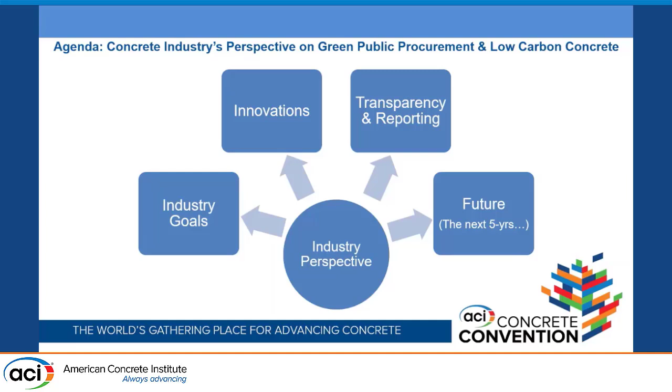So let's talk about industry goals, but before that, the one thing I do want to address is the cement and the concrete industry have been regulated for many, many years. And so when we talk about green public procurement, this is just an addition to what we have been encountering for a number of years, not only just from regulators, but also impetus from, as was alluded to, media, and also just the things that we do as an industry to make sure that we are not polluting, being wasteful, discharging inappropriately, all of those things.

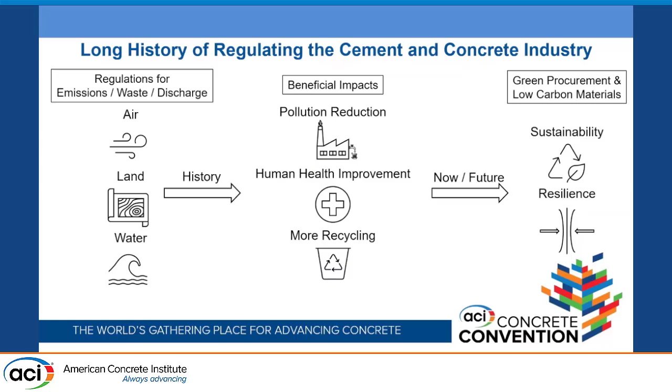So we've been doing this for a long time in terms of regulations on emissions and waste and discharge, and there has been significant benefit. Right? There's significant benefit in terms of pollution reduction, human health improvement, and certainly an increase in recycling. But if we're going to achieve what the Paris Climate Accords have required, what federal actions and policies are requiring, what state legislatures are requiring in terms of low carbon materials, then there are some things that we have to do differently.

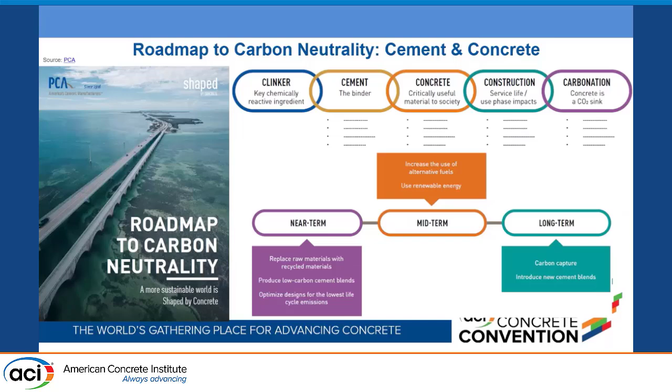Now, the cement and concrete industry has goals. These have been published for the last couple of years, and you can go and read the roadmap to carbon neutrality. But essentially what it says is the cement and concrete industries will be net neutral by 2050, and all along the supply chain there are going to be opportunities to reduce our carbon footprint and get to that net neutrality, and there are going to be near-term, mid-term, and long-term things that we will be doing. All of those things are covered in the roadmap, so I won't get into those, but the information is there, and the perspective from the industry is we will get there.

In terms of the things that we're doing right now, one of the things is just to simply be clear about what those goals are. So we want to communicate carbon reduction goals. We want to do the things that we've been doing in the past and maybe do them just a little bit better in terms of quality assurance, quality control. If we're going to be sustainable, we have to make sure that we are doing things in accordance with those specifications that drive down the carbon footprint and improve performance. Okay, so good quality control plans are a must.

And then we get into the mixtures part of it in terms of optimizing mixtures. Specifications should be allowing the use of innovative cements, SCMs, admixtures. So we get into that performance engineered mixtures type of specifications. We have to set targets, but to set targets, we often also have to know where we are. And I'll talk about that in just a second in terms of our benchmarking and the industry average that we report.

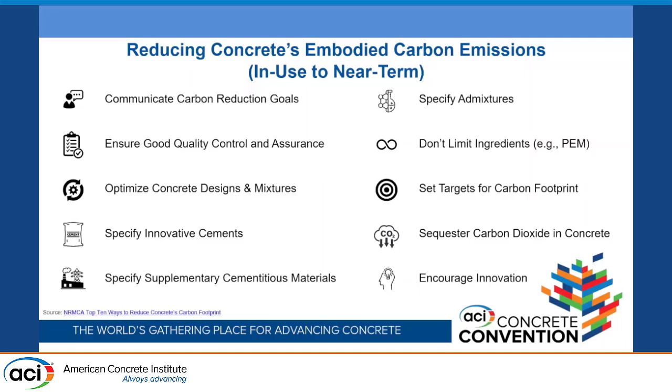And then take advantage of concrete and the sequestering of carbon, the carbonation that occurs with concrete. We should be taking advantage of that. We can use that in terms of material production. We can also use that when we look at the entire life cycle of concrete and the carbonation that occurs just naturally. All of these things should be encouraging innovation, and that should be not only at the producer level, but also at the designer and the specifier level as well. Okay, so innovation should be done by all of those parties.

So let's talk just a little bit about innovations. We could go on in terms of innovations for a long, long time, but I just want to address a couple of things. One, in terms of cement, we can have a significant impact on concrete's carbon footprint, of course. And so we begin to see more and more movement away from our typical ASTM C150 type of cements to the ASTM C595 cements, and in particular, we've already heard mentioned Portland limestone cements, right?

Those have been in the marketplace. If you look at the market right now, probably 50 to 60% of the use of cement across the U.S. right now is Portland limestone cements. There's other cements, slag blends and things like that, but the cement industry will be moving very, very quickly in terms of the cements that are introduced into the marketplace. And that is going to cause change.

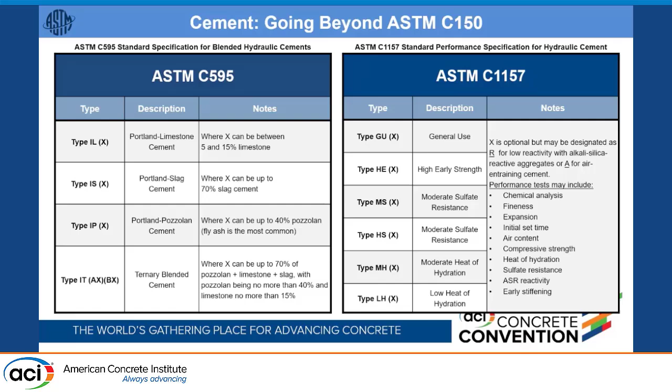I'm an engineer, most of y'all are engineers. We hate change. It is difficult to deal with, but it's life as we know it right now, and it will be life as we go forward, okay? So the complications that come along with changes are things that we are going to have to deal with. We've already had some change in terms of the Portland limestone cement, changes that contractors have to deal with, producers have to deal with, and we will begin to deal with even more. We will get more complex cements into the marketplace.

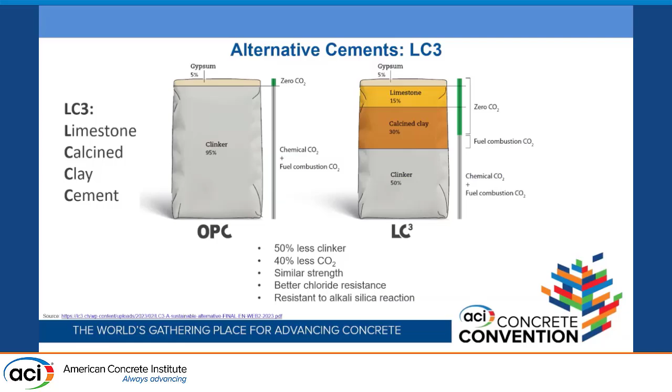What I'm hearing from cement producers is adoption of materials like this one, LC3s, or limestone calcined clay cements. This is, again, substitute materials for the clinker that is the high carbon emitter. This one in particular using calcined clays. Where you get the benefit is you're replacing about half of the clinker with calcined clay, limestone, and of course the gypsum that's already in our ordinary Portland cement.

You get the benefit because you're not having the chemical release of CO2 from the limestone through the kiln, and you have lower kiln temperatures when you're calcining clays. Take all of those things together and you can get reductions of 40% in terms of your global warming potential. So these are the types of things that as an industry we will have to be evolving to and also adapting to as we get to construction.

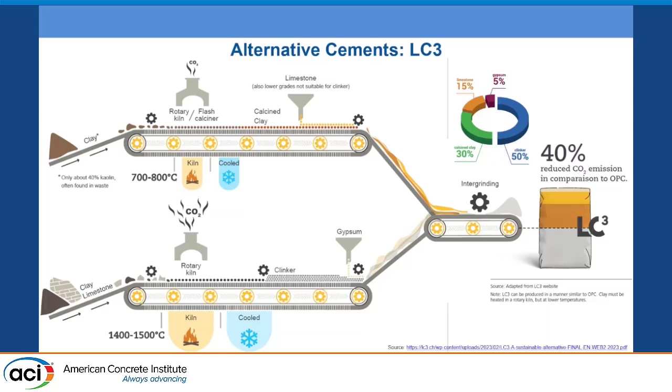We will also see, we hope, more and more adoption of performance-based specifications. But when we talk about performance, all along the process there are things that we can do. We can design optimally so that we are reducing the amount of concrete that's needed to actually perform. And that doesn't matter if that's a pavement, a structure, a bridge, whatever it is, we need to optimally design. Of course, we can take performance concepts in our material development as well.

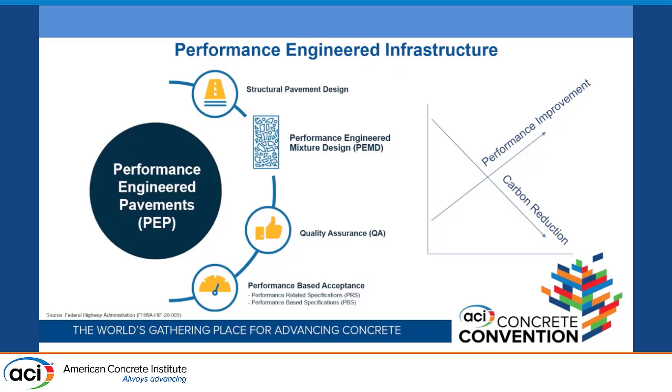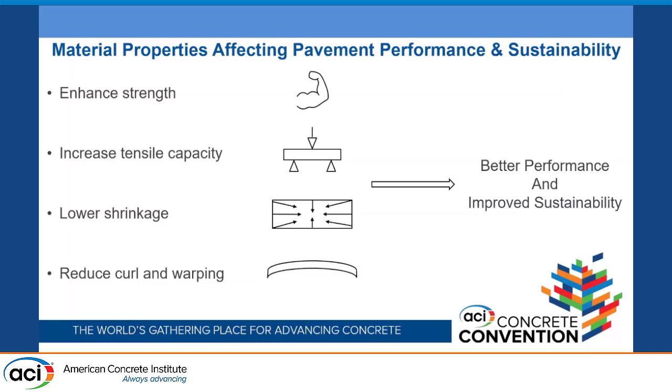And then also, when we look at QA and our acceptance, we can adopt these kind of performance-based specifications, right? So all of this hopefully will lead to better performance, but also carbon reduction. Those are the two things that can go hand in hand. But again, we have to have those things in place so that producers, specifiers, designers can achieve what we're trying to achieve. So when we talk about performance improvements, enhancing strength, increasing tensile capacity when you're talking about pavements and beams and structures, lowering shrinkage, reducing curl and warping, particularly when we talk about pavements, all of those things can lead to better performance and improved sustainability.

Let's talk about transparency and reporting a little bit. This is something that NRMCA has been involved with for well over a decade. We have to be able, as an industry, to report where we are in terms of our global warming potential. We do that many different ways. We can do that with environmental product declarations that are facility and mixture specific, but we can also look at us broader across the industry, and NRMCA produces an industry-wide EPD. We report that about every 2 to 3 years.

And we started this back in about the 2013, 2014 time period. And when we look at how we have done as a ready-mix industry over that time period, we can see that we've reduced our carbon footprint by about 20%. So we are making strides as an industry to get where we need to go, but we certainly have more work to do.

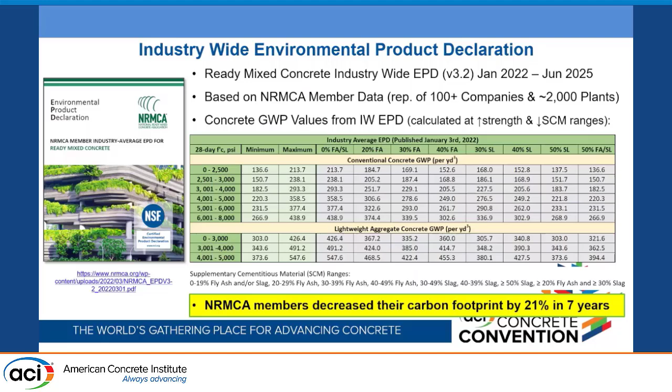We also publish a regional benchmark report. We have 8 regions across the U.S. where we report benchmarks that cities, states, other agencies can utilize to be able to assess, thank you, Sam, to be able to assess where you are in your region versus other producers, right?

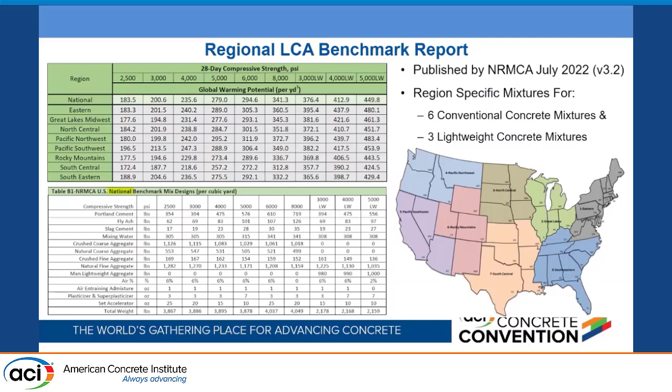This is important so that we can understand where we are and also how to be able to drive down our carbon footprint. So we report that again about every 2 to 3 years. And again, this is used by many agencies, cities, states, and even the Federal Highway Administration, through their low carbon transportation materials grants, have indicated that they are going to utilize industry data to establish their benchmarks that state DOTs will use initially to be able to get those low carbon transportation materials grants. They had a timeline for that.

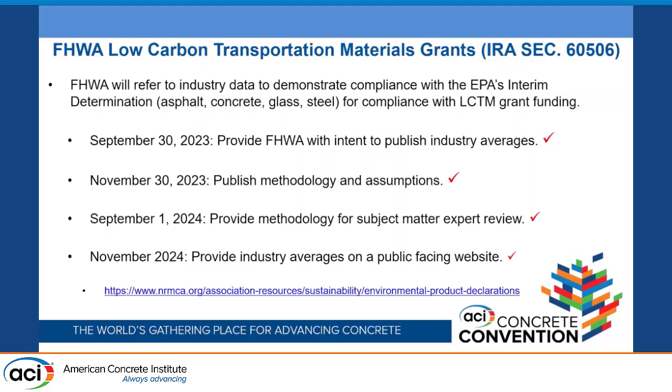We have, as an industry, published our regional benchmarks, but also asphalt, glass, and steel will be publishing theirs as well. If you want to see our benchmarks, you can go to our NRMCA Sustainability and EPD page, and you can see our regional benchmarks. What's a little bit different that we had to do: in years past, we have only reported our average values over a range of strengths in each one of the regions.

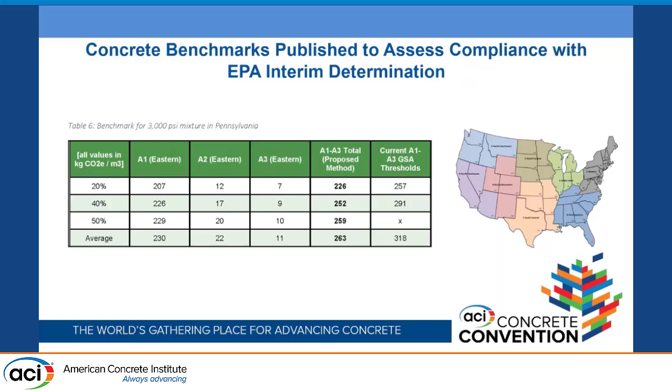For states to be able to assess how they are in compliance with the EPA's interim determination, that 20th, 40th percentiles, we had to go back to our data and rerun some analysis, and we have done that. So we have produced that report. It has been reviewed by an FHWA expert task group, and they have passed that along to the FHWA. And again, when those low carbon transportation materials grants are awarded to state DOTs, they can utilize those values as their initial starting point for benchmarking.

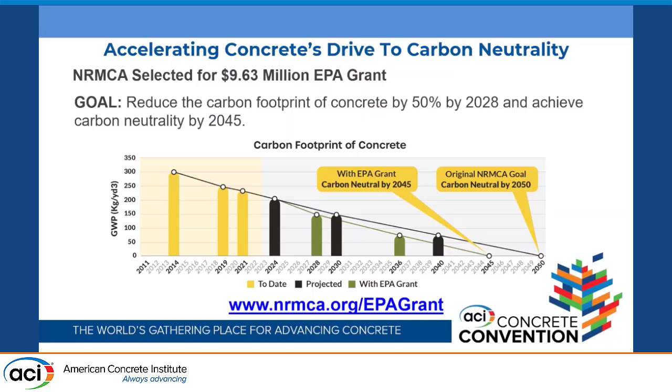So where do we see the industry going over the next 5 years? We're very grateful for the opportunity to have pursued one of the grants from the EPA. We were awarded a grant that was just under $10 million. And there were a couple of things that globally will help the industry. One, initially I said that by 2050 we wanted to be carbon neutral. There's an interim step by about 2030. We wanted to be at about 50% lower than we were in 2014. With the EPA grant, we see that we should be able to accelerate that so that we are at about 50% reduction by 2028 and hope to be carbon neutral by 2045.

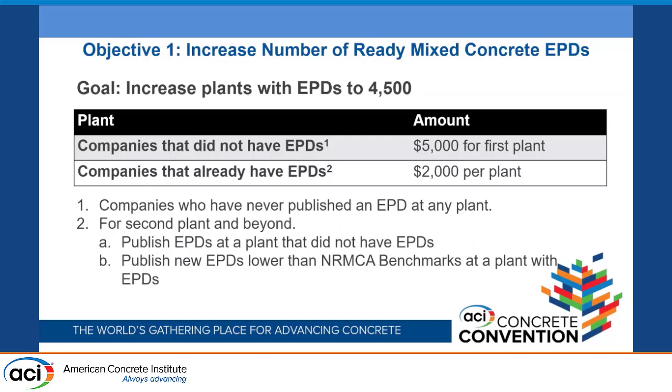There are 5 objectives that we stated to the EPA for our grant. The most significant is to be able to award grants to concrete producers, not just NRMCA members, but all concrete producers, to be able to help them generate EPDs. Okay, and so companies that don't have EPDs at any of their plants will be able to get some money. If you have been at the forefront and have produced EPDs over the last several years, you're not left out of the grant money. You will be able to still get grants from NRMCA to be able to help offset some of the cost with generating those EPDs. So that's the first objective.

And that's where most of the money will go, is through those pass-through grants. But there's also money dedicated to help ensure technical proficiency of the concrete industry personnel. What does that mean? It's essentially to help train concrete personnel in gathering the data that's necessary to generate the LCAs for the EPDs. So we want to be able to develop a certification program to help them.

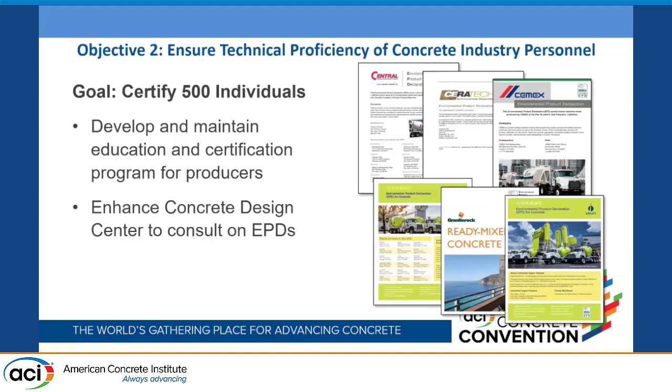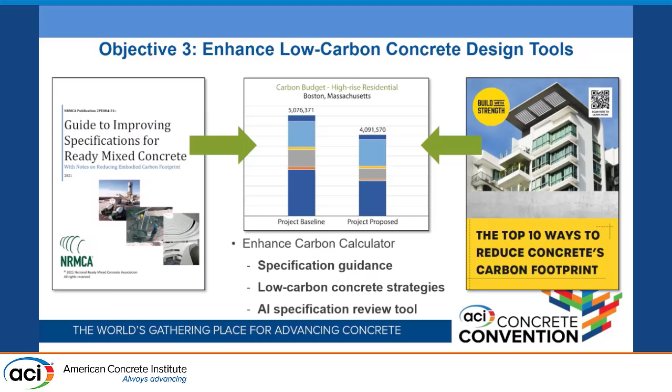Objective 3 is to really enhance and develop some low carbon concrete tools. There's an NRMCA concrete calculator that's available to you now. Just go to the NRMCA webpage, you can find that calculator. But we want to be able to enhance that calculator and also provide specification guidance for those that need it to be able to produce specs with low carbon goals.

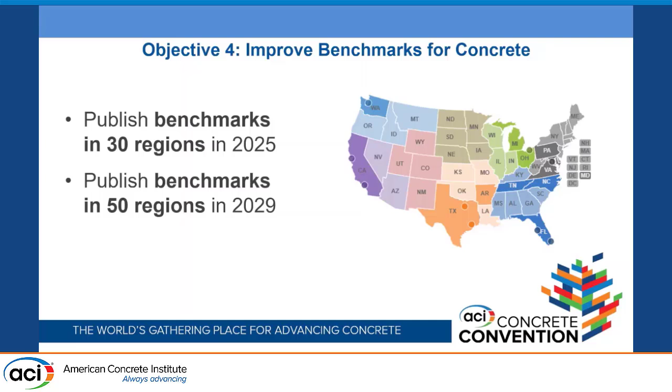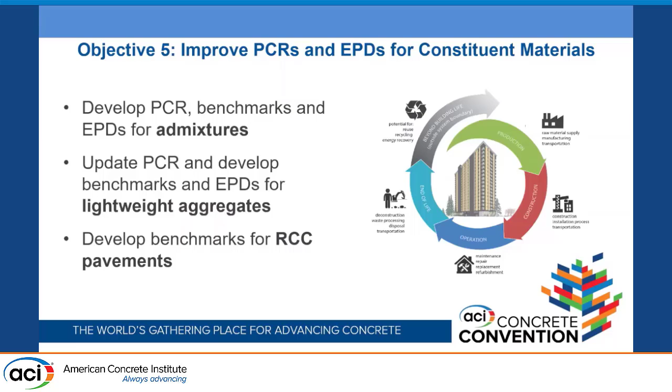We also will improve the benchmarks, go from about 8 regions to up to 30, and then eventually 50 regions by 2029. And then also improve PCRs and EPDs for some of those constituent materials, primarily admixtures and lightweight aggregates, but also help the Roller Compacted Concrete Council develop benchmarks for RCC pavements. So we will be doing that over about the next 5 years.

The starting point for us, we're still in negotiations with EPA to get a contract in place. We feel like we'll have that in place in December or January, and then we will have everything in place by about spring of 2025 so that people can start getting grants.

So I appreciate the opportunity to come and report what the industry is doing. Look forward to our panel discussion. Thank you very much.